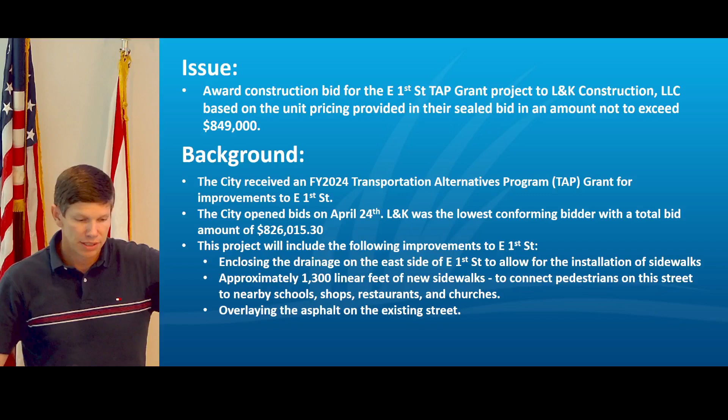Clint, you got a couple things for us on our capital projects department? Yes, sir. The first one I've got is the construction contract for the East First Street Improvements Project. And this is the same one that we came in a couple weeks ago for the CE&I. So we opened bids last week, and L&K Construction had the lowest bid. We recommend approving in an amount not to exceed $849,000. And we did open bids on the 24th. We had 5 bids, and L&K was the lowest in the amount of $826,000. But since it's unit pricing, we had $849 in the budget, so we'd rather go ahead and award in case

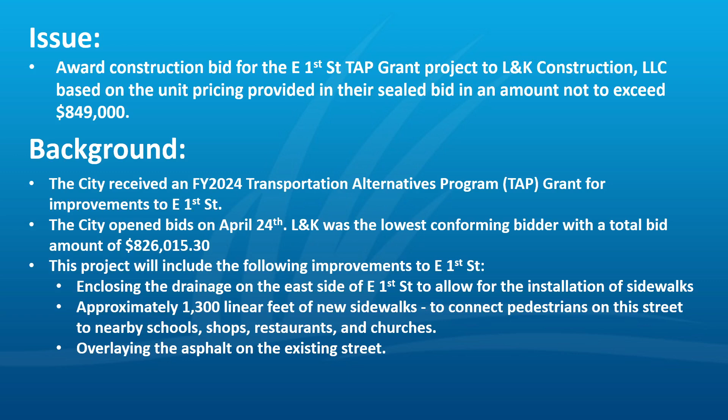we have any overages. And so this is the project that includes the improvements to East First Street, which are enclosing the drainage on the east side to allow for the installation of sidewalks and approximately 1,300 feet of new sidewalks to connect the pedestrians here to the nearby schools, shops, restaurants, and churches, and then overlaying the asphalt on the existing street after we're done. And again, here's that map. So it's going from 16th Avenue to 20th Avenue, and it's going to be on the east side there in front of the apartments.

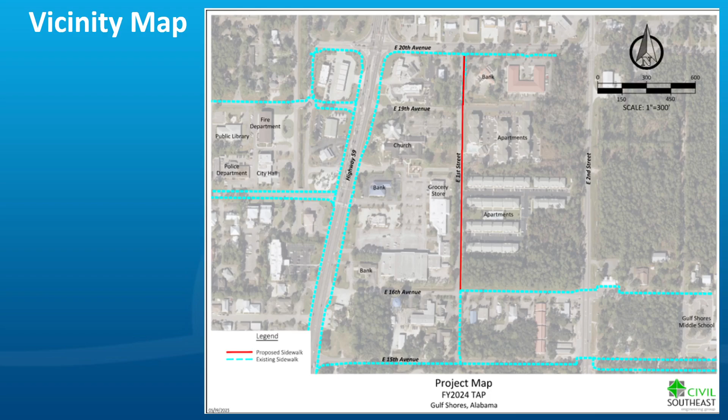And so this is budgeted in this year's budget. And so the total cost of the project is just over $1 million. The TAP grant is providing $800,000, and the city is responsible for the match of $209,000. So staff recommends awarding the contract to L&K in an amount not to exceed $849,000. And I'd be glad to answer any questions if you have any. Clint, council, any questions, comments?

I have just one. Forgive me for not remembering, has L&K done any work for us before? Yes, they've been subcontractors on a lot of projects. Trying to think, they've done a little bit of work on Waterway East for ASI. They've done some smaller sidewalk projects. This is probably the biggest one directly to L&K that we've had before, but they do a good bit of work around here. Okay, thank you.

I'm just a little nervous after what happened to us on Highway 59. This is a big project. It's not that contractor. This is a big deal on this side of town, and I would like to make sure that one gets done right and finished on time is all. Thank you. Yes. Anybody in the audience with any questions or comments? Okay, Clint? All right, the next one I've got is to apply for a fiscal year 2026 TAP grant.

And so this is to authorize the Capital Projects Department to pursue another TAP grant for next year and to commit to providing the required matching funds if awarded. And the deadline to submit for next year's round of grants is the end of this month.

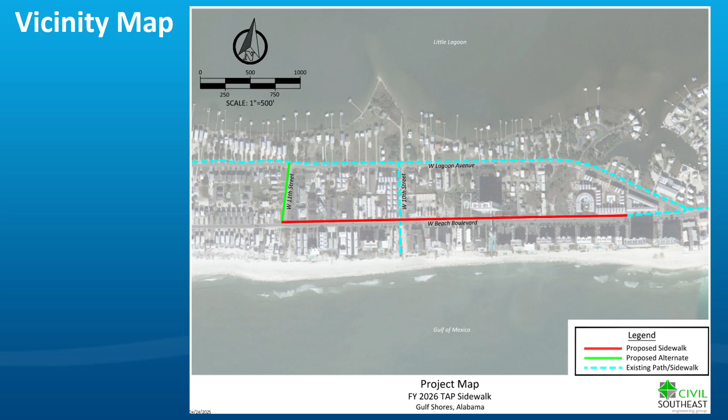And the total estimated cost of this would be just over $1 million, similar to the East First Street project. And same deal, if awarded, the grant would provide $800,000 in funding with a city match of $210,000. And this would need to be included in next year's budget if awarded. We'd probably find out in the fall, and by the time you get through permitting and everything, it wouldn't be really starting until next year.

So staff recommends authorizing Civil Southeast to submit the TAP application on the city's behalf and committing to providing the matching funds next year. And I'd be glad to answer any questions if you have them. Thank you, Clint. Council questions?

Clint, will this take the place of the existing bike path, or will they be able to move over to this? Yeah, we would leave the existing bike path there. So this would be basically as far away from the asphalt as we could get, so up closer to the right-of-way line. There would be a few light poles and things we might have to weave around, and some utilities and stuff, but this would be separated. We should be able to have a clear space of about 10 feet between asphalt and the concrete in most places. Okay.

Anybody in the audience, any questions or comments? Thank you, Clint. Jenny, Engineering Department?

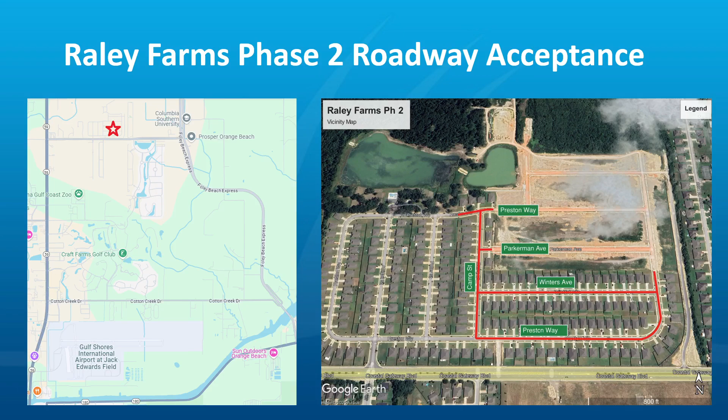Again, Raley Farms Phase 2, you can see on this map, is just about halfway between Highway 59 and the Foley Beach Express on the north side of Coastal Gateway Boulevard. And it includes a portion of Preston Way, a portion of Parkerman Avenue, as well as Winters Avenue and Camp Street. Thank you, Jenny. Council, any questions or comments? Audience, anybody? Anything? Thank you, Jenny.

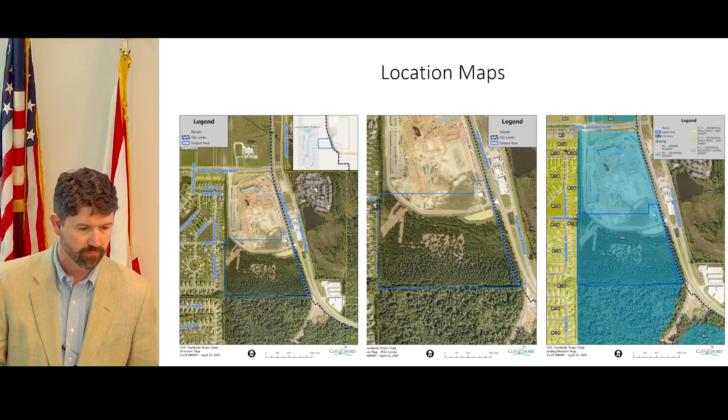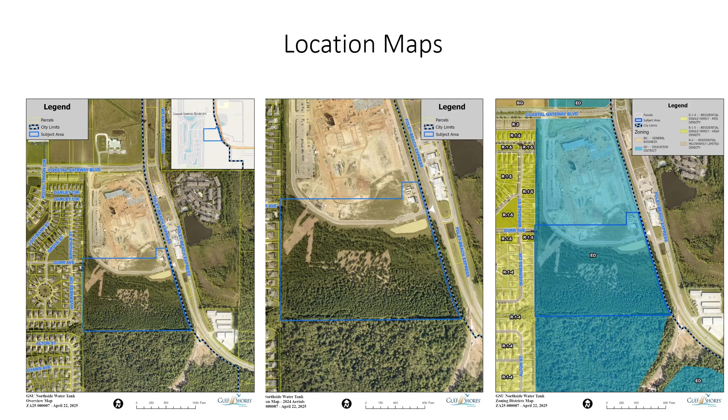Planning and zoning, we got 2 people, Scott and Andy will be doing this category. Yes, sir. Agenda item 5A is a conditional use permit application for the water tank at the high school site. Your maps here, the one on the left is a smaller scale, just showing the general area. It's south of the high school site. The one in the middle is a closer shot of the proposed area, and the one on the right shows the zoning. That blue shade is educational district zoning.

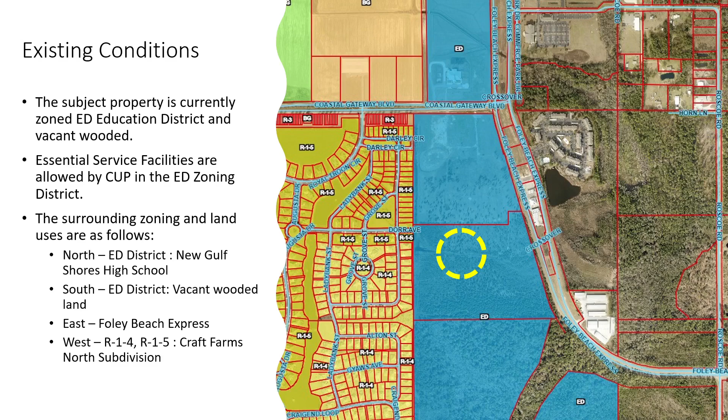We did notice the public prior to the planning commission meeting. So the current site is just east of Craft Farms North, and west of Foley Beach Express; on the other side is City of Orange Beach. To the north is the new high school building, and then to the south is wooded area.

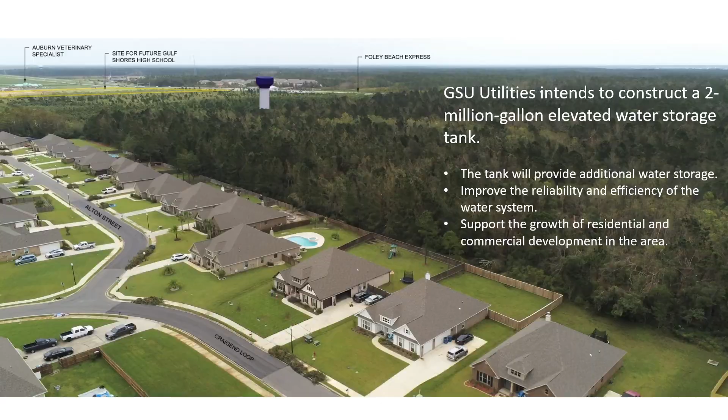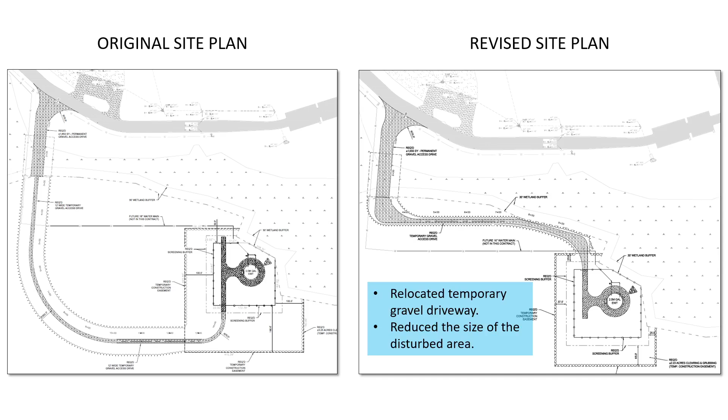This is a rendering of the proposed site. So our viewpoint, we're hovering over Craft Farms North and looking toward the northeast, and you can see the proposed water tower there in the background. The plan on the left was what was originally submitted to staff prior to the Planning Commission meeting. On the right it was revised to modify the driveway access so as not to cause any future conflicts with potential sports fields and other educational facilities.

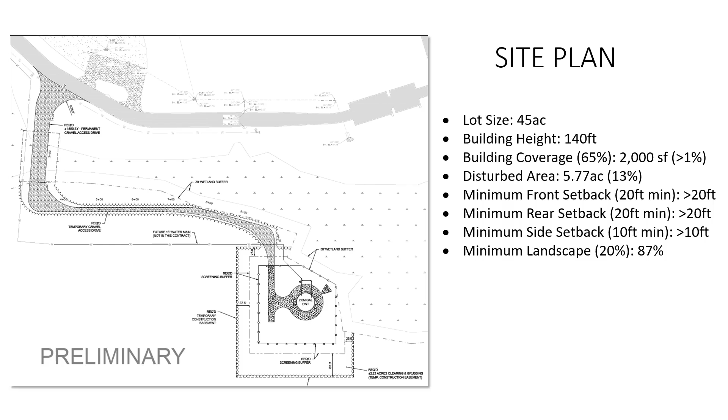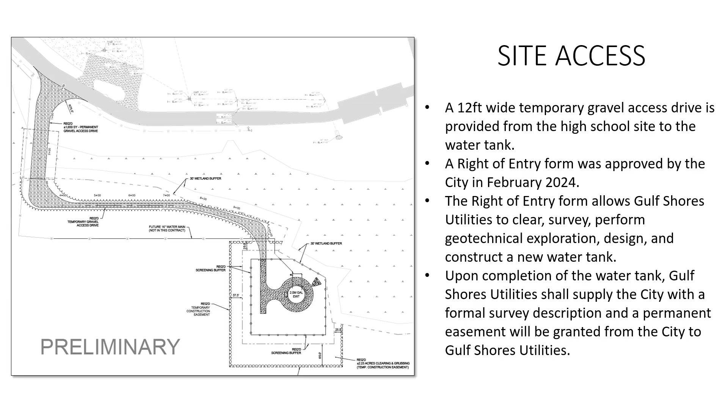So the site plan, as you can see, it's a 45-acre site, so there's more than adequate room. The tank itself will be 140 feet tall, and it is very far away from all the minimum setbacks. The site access is a 12-foot today. Well, in the near future, it will be a temporary gravel access from the existing drive that's out there. At the end of the project, Gulf Shores Utilities will supply a formal survey so the city can turn around and give a permanent easement for access.

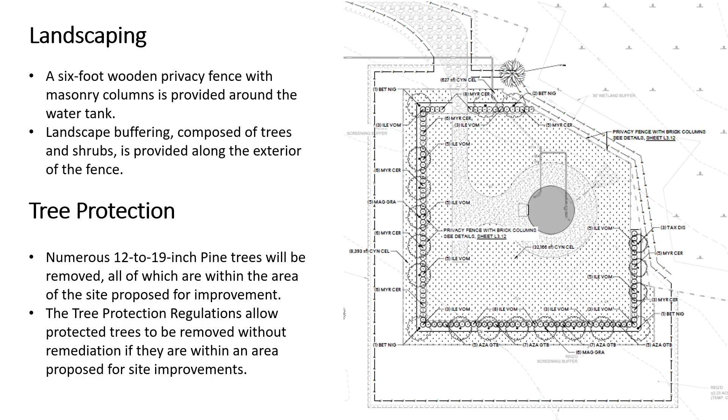Part of the conditional use permit is, again, the underlying zoning is educational district, and essential service facilities are a CUP allowed use in the educational district zoning. So we looked at that again, locate the water tank to maximize the distance from adjacent businesses and minimize the visibility as much as possible. Keeping in mind it's 140 foot tall, but the base is as far away as possible.

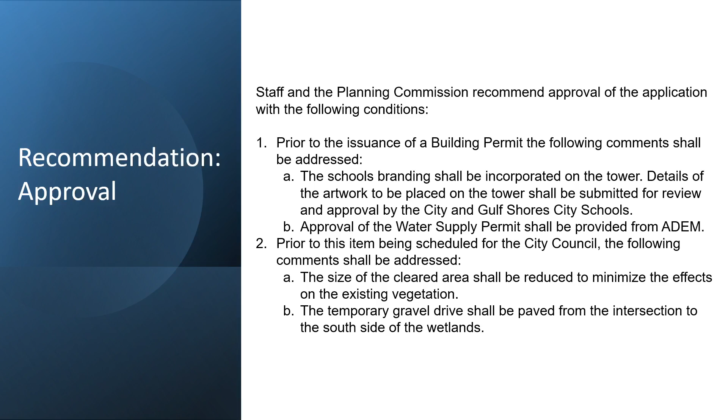Any questions on this application? I didn't understand, did you say the FAA did require lighting or did not? No, sir, it is not required. However, if they do put lighting on the top, it'll have to follow FAA guidelines. Okay.

Your honor, we have some members of the utility board here, if there are any specific questions for the utility. Rhonda Davidson is here. Yeah, okay, Rhonda's here. And I will point out, you will not see this on next week's agenda. We have to do some minimum advertising, so it may be into June before you see it again. Okay.

Andy, you got a CUP plan for MediaCom?

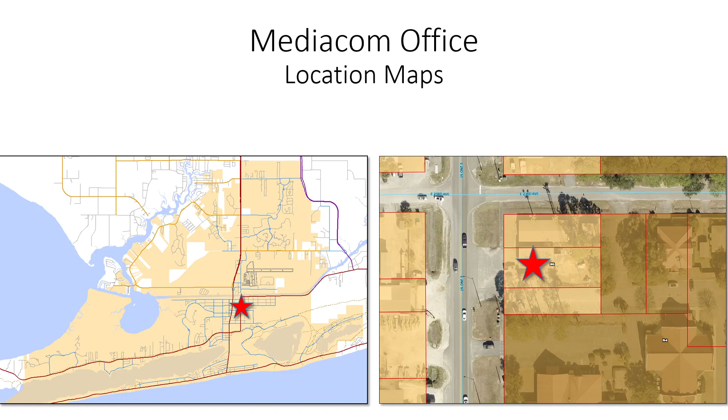Underlying zoning is general business. Office uses are allowed by right. Overlay zoning is the site is within the Waterway Village Overlay District and in the T5 Neighborhood Commercial Subdistrict. So the proposed office use also is allowed in the T5 Neighborhood Commercial Subdistrict. Future land use plan designates this parcel's future land use as commercial and mixed use. And then the Planning Commission voted to recommend approval of this application at their January 25th, 2025 Planning Commission meeting.

So the proposed site plan, the existing building is in brown. The proposed 973 square foot addition is in brown highlighted with yellow. A lot of the green area to the front and to the lower part of the existing building is currently asphalt. All that will be removed and become landscape space. The green area behind the building is existing dirt / landscape space. You will see the parking that's proposed will be out within the East 2nd Street right-of-way.

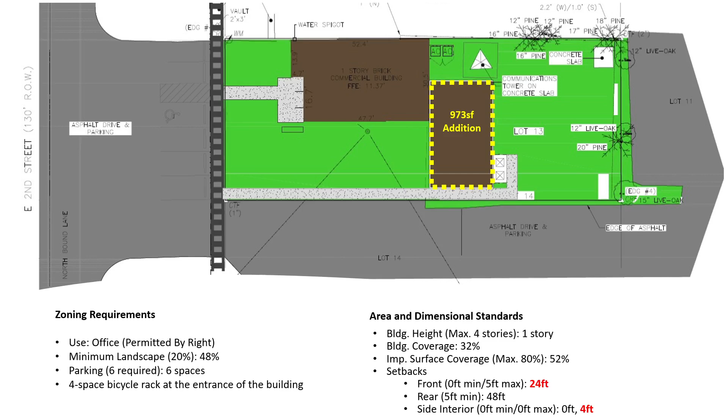And then the interior side yard setbacks in the Waterway Village Overlay District are 0 feet minimum and 0 feet maximum. The existing building is 0 feet on the north side yard setback, but the new proposed building will be 4 feet off of the south side yard setback. So that's another reason they'll need a conditional use permit. The garbage containers are stored behind the building, and a concrete sidewalk has been provided as a way to roll the trash containers out to the public right-of-way for pickup.

Proposed addition to the building, right now it's proposed to be Hardiplank board and batten siding. There is a condition in our recommendation because this is an older building, and we want to make sure that the proposed architecture does not detract from the existing older building. So we place a condition in there that some of the architecture could change based on our review of the older building versus the proposed building, as well as some of the historic architectural regulations that actually Scott has a lot of experience with in some of his former jobs. So we're still working with the applicant. They agree to make sure that the architecture does not detract from the existing building.

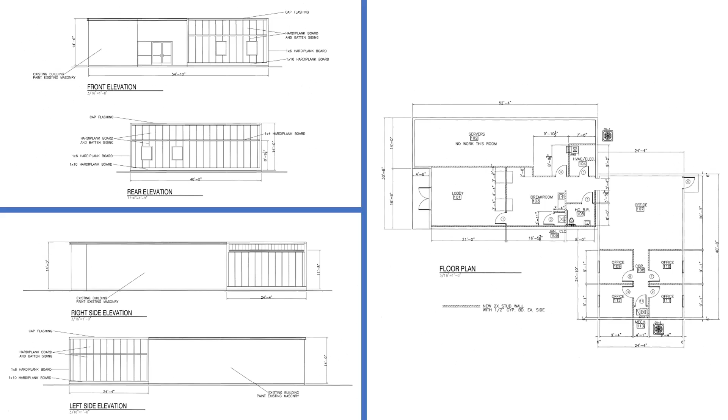Proposed addition will have basically 4 offices and a larger office space. And then the existing building has a lobby and a break room in it. So again, access and parking, the area in front of the building will be utilized for the 6 on-street parking spaces. The applicant has provided an engineer's estimate in an amount of just over $38,000 or close to $39,000 for the construction of the angled parking, sidewalks, and landscape planter strip.

So as you know, we have a design for the on-street parking along East 2nd Street. They are not constructing it per the city's design yet, but they're paying a fee in lieu so that we can take their money and construct it all at one time whenever we get to that point. But they will utilize the East 2nd Street right-of-way for this required 6 on-street parking spaces. Similar to what we did at Galway House, they utilized some of the existing parking within the right-of-way for their required parking.

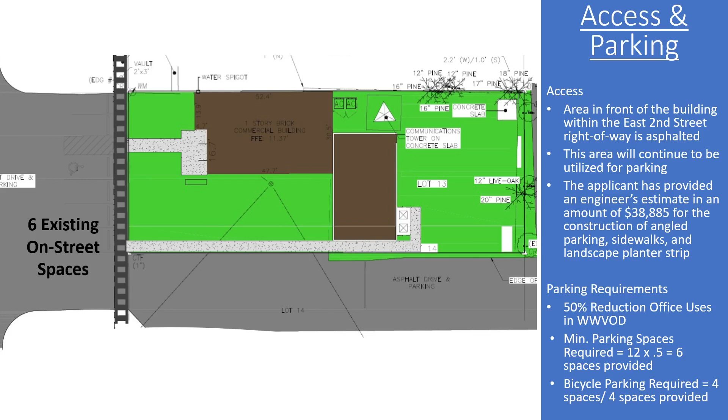Landscaping and tree protection, there are 6 existing trees on the site, including 2 12-inch live oak trees. All those trees will be preserved. They've actually earned 13 tree credits by preservation of the trees. The landscape and open space, the Waterway Village District does not require the normal landscape standards. It only requires parking lot landscape standards. So the applicant actually exceeds the minimum requirements. They provided a substantial amount of landscaping between the on-street parking and the existing building, which should help greatly enhance the looks of the building. Instead of having a sea of asphalt in front of the building, now it'll be a nice landscape space there.

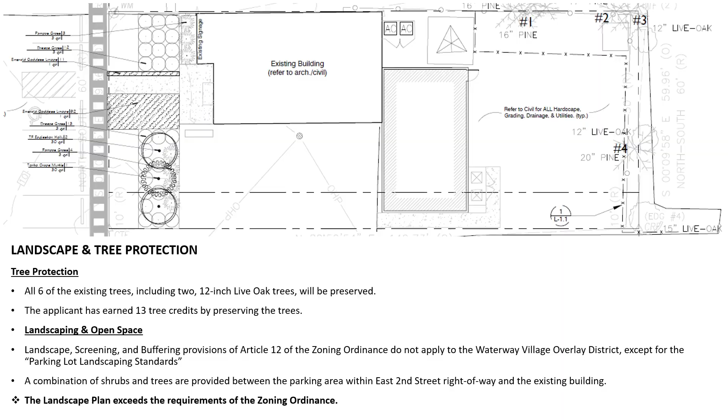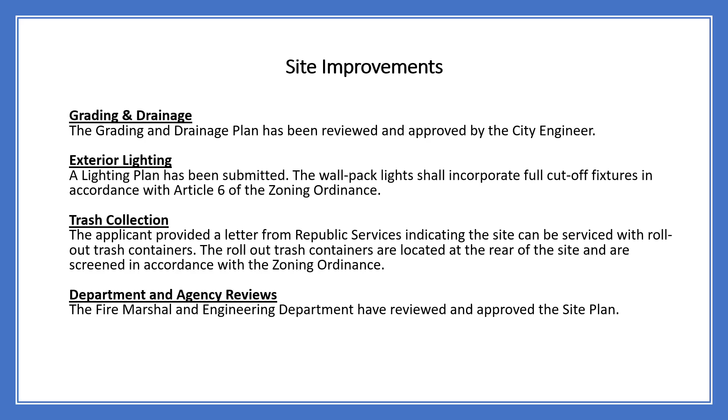Site improvements, grading and drainage plans, exterior lighting, trash collection have all been reviewed and approved. And the fire marshal and engineering department have reviewed and approved the site plan. Conditional use permit. Again, they seek a couple deviations from the underlying zoning standards. So they request one modification to Article 13-5, alteration of non-conforming structures, to allow a new addition in the continued use of the existing building and premises.

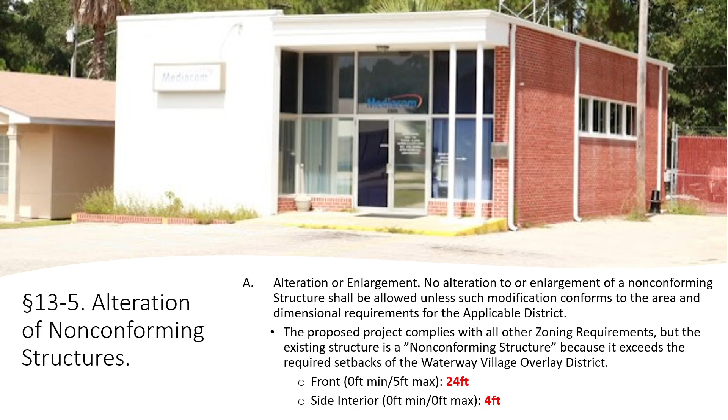Here's an older picture of the Mediacom building. So this section states that no alteration or enlargement of a non-conforming structure shall be allowed unless a modification conforms to the area and dimensional requirements of the applicable zoning district. The proposed modification or new construction complies with all the zoning requirements except for the two setback deviations that I pointed out previously. The front setback, the existing building is 24 feet, and the minimum standards are 0 feet minimum, 5 feet maximum, and then the south side yard setback proposed is 4 feet, and the minimum is 0 feet. So they seek a deviation to those couple of setback regulations.

City staff does support the applicant's request. This building was constructed in 1961. It's one of the older commercial buildings in the city. This, I believe, was the original post office. I know it was a post office at one point in time, so we would like to preserve the historical character of this building. This complies with the purpose of the Waterway Village Overlay District, so we do support those deviation requests.

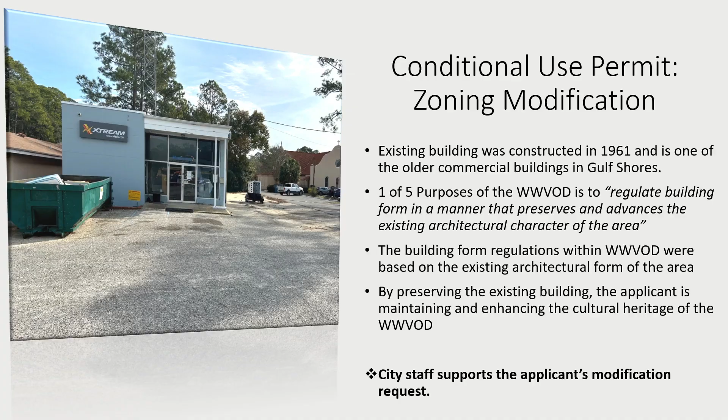So with that, staff and the Planning Commission recommend approval of this application with 4 conditions. Grant a modification to 13-5 to allow the applicant to utilize and add on to the existing building. Number 2, the wall pack light fixtures shall be full cutoff fixtures. Number 3, prior to the issuance of a building permit, the applicant shall pay a $38,885 fee in lieu instead of constructing the angled parking, sidewalks, and landscape planters within the East 2nd Street right-of-way. And then number 4, the applicant shall work with the city to preserve the historical architectural character of the building.

I'll be happy to answer any questions, and much like the previous application, we'll have to advertise this before it can be placed on a city council agenda, so it'll probably be late May or early June.

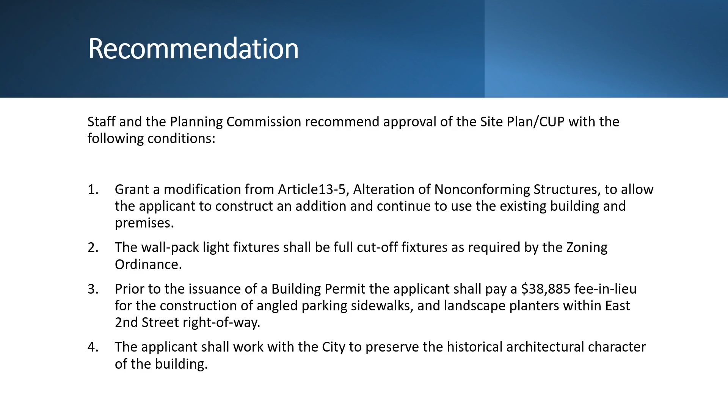We've not had many of those here since I've been mayor, so it's kind of a new process for me. Right, me too, Mayor. We just want to make sure the character mirrors the existing building, but doesn't look like it's a completely different building or detract from the existing building.

Any other questions, council? Andy, could you go back to that last slide, explain number 3 to me again? For the condition? Yeah, this one. So, the fee in lieu. So we do this a lot when there's not an existing sidewalk within a public right-of-way. So the zoning regulations state that the applicant has the option to build a new sidewalk in accordance with our master bicycle and pedestrian plan and the zoning ordinance, or they can pay a fee in lieu. Because there's no existing sidewalks in this location, and the city's about to go through streetscaping construction, hopefully, in front of this site, we recommended that the applicant pay a fee in lieu.

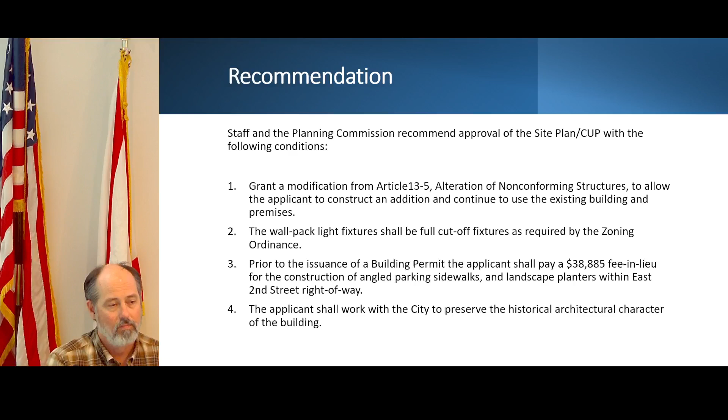So they give us an engineer's estimate for how much the sidewalk would cost, the parking, in this instance landscape planters, and that came out to be $38,000. So they're going to pay a fee instead of constructing those improvements. Okay, that's all I was curious about, the planters and whatnot. All that's within the East Second Street public right-of-way. Okay, yeah. Does that make sense? Okay. And one other question, on the setbacks, can you go back to that slide? Certainly.

Right, yeah. What does that mean, 0 and 0 for the side? So that means that in the Waterway Village Overlay District, in a lot of the sub-districts, the building should take up the entire width of the property. So if someone would, or they have to build to the entire width of the property? Yes, sir. Why is that?

So the idea in the Waterway Village District is to kind of create a downtown building form like you may see, and I'm going to use Fairhope. Downtown Fairhope, all the buildings are attached to one another. Yeah, wall to wall. They're on their own lots, but they're all attached to one another so that they're built out 100% of the lot width, and the parking's usually in the street. I think there's some places in Fairhope that have little alleys where you can get to service, the garbage and deliveries and things of that nature.

So that's the idea of this district, but when there's existing buildings there, it doesn't always work. Yeah, obviously, it's not gonna work. Right. Anyway, probably people at home watching aren't familiar with all this, so. Yes, sir.

That's it. Thank you. I just want to reiterate the importance, I think, the value of this end product, the aesthetics of how this building gets designed and finished out. I know we have a provision for preservation of historic buildings, but every old building in town to me doesn't have historic value worth preserving and adding on to. And I'm not saying anything about this particular building, but every old building doesn't qualify. So to make a new building look like an old building that maybe doesn't qualify. So my point is, I think it's really important.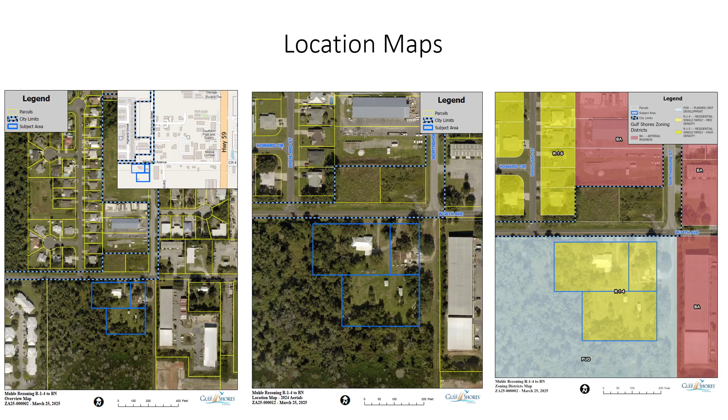The diagram on the left shows that it's located on West 36th Avenue, almost but not quite directly south of the intersection of West 36th Avenue and North Shore Street. You see a zoomed in version in the middle of the screen. The right-hand side shows the existing R1-4 zoning, surrounded to the south by PUD and then BA zoning, and, oddly enough, some unzoned property across the street. Existing conditions: the property currently contains a single-family house and a couple accessory buildings.

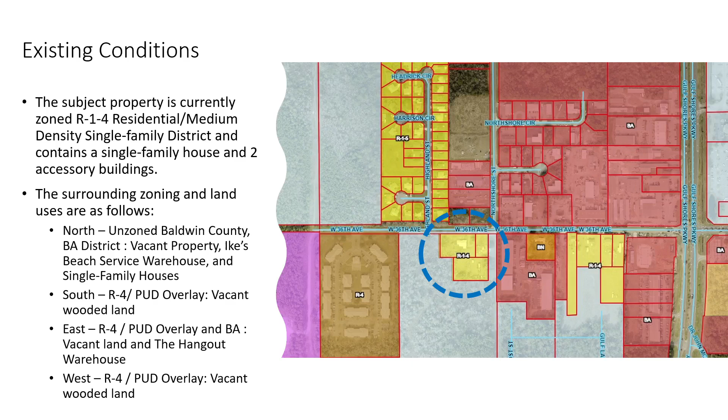Surrounding zoning and land uses: directly north is unzoned Baldwin County. Further to the north, you've got some BA arterial business zoning, occupied by Ike's Beach Service warehouse. To the south is vacant wooded land, part of the Lake Planned Unit Development. Directly east is also vacant land, part of the Lake PUD. Further to the east is zoned arterial business, occupied by the Hangout warehouses. And to the west is vacant land, part of the Lake Planned Unit Development. A little bit further is Seagrove Apartments.

At the March Planning Commission meeting, the Planning Commission voted 5-1 with one commissioner abstaining to recommend approval of this application to the City Council. So the existing zoning, again, it's R14, medium density single family. This district exists for the development or preservation of existing single family houses.

The requested zoning is neighborhood business district. The neighborhood business district is intended to provide a transitional buffer between commercial activities and nearby residential neighborhoods. Non-residential uses are limited to those that can be compatible with the residential character of adjacent neighborhoods.

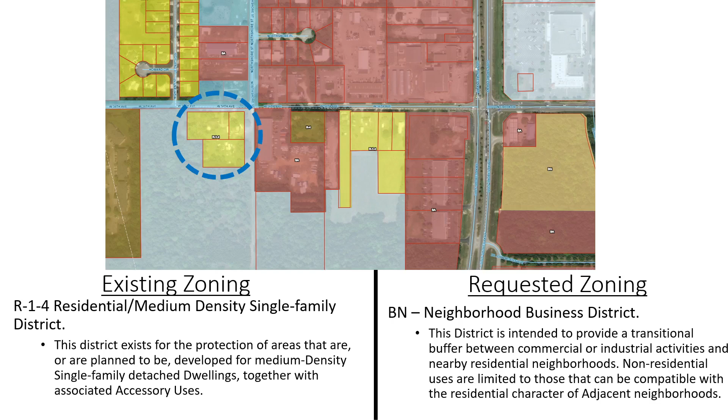So in the neighborhood business zoning district, number one, the permissible commercial uses are greatly restricted to only those that are pretty much compatible with housing. And then also any commercial use greater than 5,000 square feet must go through the CUP process. That's the only way they're allowed.

The future land use plan designates this property's future land use as mixed use commercial. As you all know, mixed use is encouraged in the land use plan. Mixed use may be one development or one building with commercial on the bottom and residential on the top, or it could be horizontal, spread across the land with a commercial building and then residential buildings on the same property.

This is a fairly small property, 2.37 acres, so it'd probably be hard to do a lot of horizontal mixed use. And then mixed use centers are also located within or adjacent to activity centers. This is relatively close to the State Highway 59 and West 36th Avenue intersection. There's the site.

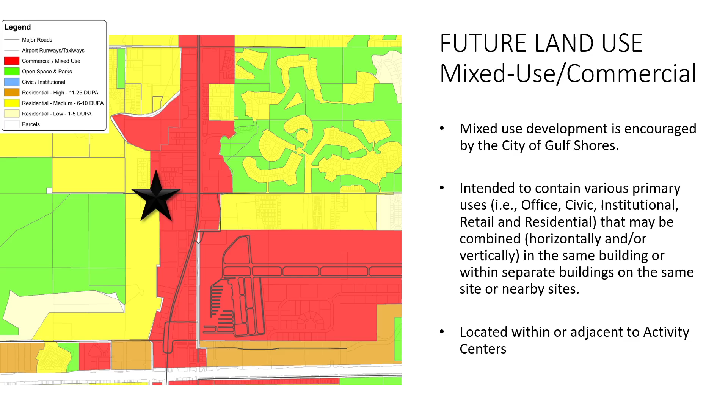So under the analysis portion, the property is located at the intersection of West 36th Avenue and North Shore Street. This has become a lot more of a primary route for the residents within Aventura and kind of a cut-through route for citizens getting around, dodging the traffic on Highway 59 and going towards Oak Road West. The surrounding area is a mix of commercial uses, the Highlands subdivision, warehouses, and vacant wooded land associated with the Lake PUD.

The land use plan encourages mixed use. We believe that the rezoning of this property to neighborhood business would support the mixed use development goals of the future land use plan. The neighborhood business district is intended to provide a transitional buffer between commercial uses and residential neighborhoods. Where this property is situated, it's located right now between commercial uses to the east and residential uses further to the west.

Again, the commercial uses are greatly limited in the BN zoning district. And we believe the configuration and use of the property aligns with the goals of the neighborhood business zoning district. And with that, staff and the planning commission support the requested rezoning and recommend the city council approve the application. And again, since it's a rezoning request, it will have to be publicly noticed and will not be heard at next week's agenda, probably either late May or June. Be happy to answer any questions.

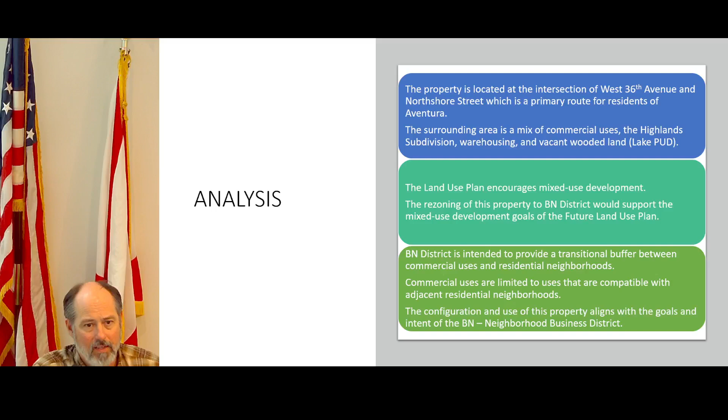And Councilman Harris is correct. Conditional zoning is allowed by the zoning ordinance. So if the city council wants to place specific conditions on a zoning, it is allowed. If there was concern for that multifamily use, that 23 units per this site plan, do we have any other ability to regulate the intensity of that property if it's zoned neighborhood business?

So without placing any conditions on it, neighborhood business allows 10 units per acre. The maximum they could get there is 23 units. Any multifamily development would have to follow the relatively new multifamily regulations in Article 1121 of the zoning ordinance. I think two different building types would have to be on the property, two different types of open spaces, a couple of different types of amenities, blocks and streets. So I don't know if you could get 23 units, but that is a maximum that is allowed there.

So there will be another process to go through with additional regulations to build multifamily there. I can't tell you exactly what you could get, but it would probably be challenging to get the maximum potential there. Would that have to go through site plan approval, correct? Go through site plan approval, yes, sir. Would that come to the council, or would that be just the planning commission?

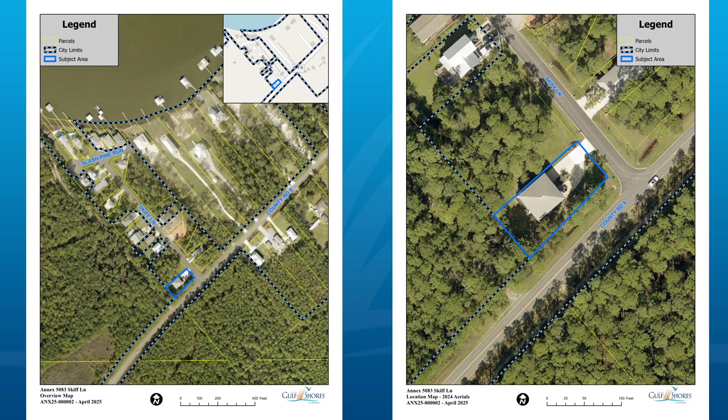Agenda item 5D is an annexation request. So it's lot 1 of the River Pine subdivision on Skiff Lane. The application states that the reason for the request is for city benefits and city schools. So your map here on the left shows the entire River Pine subdivision between County Road 6 and the river. The map on the right just shows a closer shot. There's an existing single-family structure, a house, on the site.

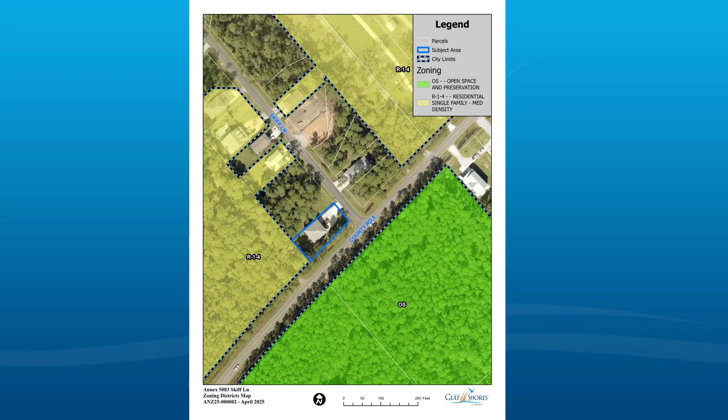This map is probably a little easier to read. It's the zoning map, so the shaded areas are inside the city limits today. So the yellow is R14, single-family residential. So you'll see the site is contiguous to existing city limits. And then across the street, that green is city-owned property that's zoned for open space. So two sides, you have the contiguity. Well, that's my last slide. That's in the report. And if you have any questions, I'll be happy to answer.

Council, any questions, comments? Anybody? Thank you, Scott. Thank you. Grant? Yes, sir. Good afternoon, everybody.

So we have before you today an assembly permit application. This is Lulu's Presents Doc's Hot Trot for ARC, requesting June 14th, 2025. This is a long-standing 5K and 1 mile fun run that takes place in and around Lulu's, and they run through Commerce Park, and I'll show you the map in just a second. June 14th, 2025, which is a Saturday.

Dennis Young, who I spoke to earlier today, is representing Robertsdale Rotary Club Foundation to benefit the ARC, Retired Citizens of Baldwin County. It's a 5K and a 1 mile fun run, anywhere from 250 to 500 participants, but all the pre and post activities take place at Lulu's. So Lulu's is a big partner with Robertsdale Rotary Club.

So before you is the standard approved route that is an actual defined race route that allows the participants to qualify for other types of runs. The start finish is at Lulu's, and it runs out Waterway East and then runs through Commerce Loop, then back to Lulu's. We will be having some construction during this time of the month of June.

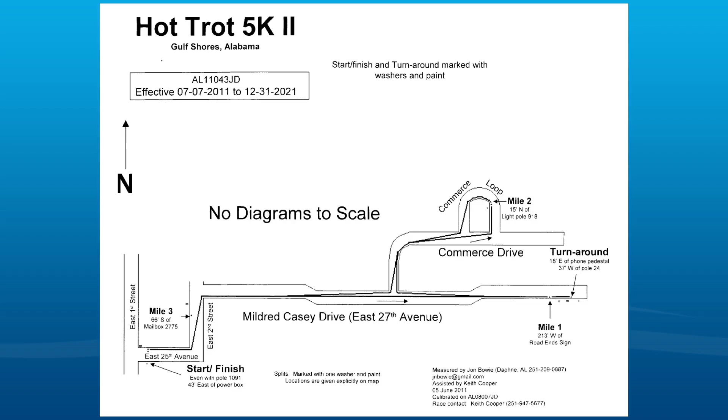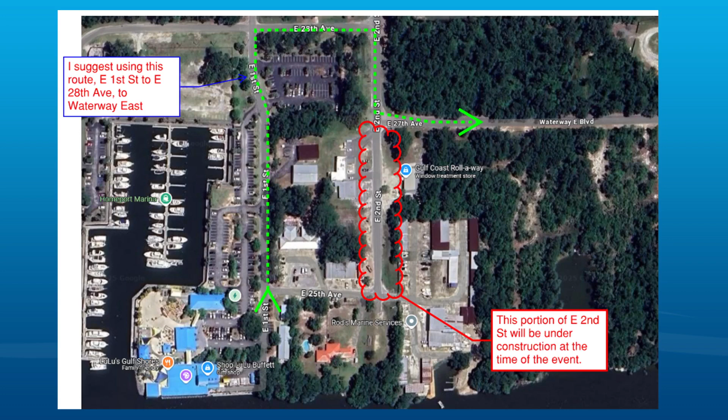So Clint, with our Capital Projects Department, has proposed an alternate route where in green on your map, they would run north out of Lulu's up to East 28th Avenue, then east over to 2nd, then south to Waterway East, and then roll into the rest of the race route. We are recommending approval of this application. We will work with the applicant and the contractor, and the city will make the final determination on what route is the best for accommodating the construction that's going on Waterway East, in and around Commerce Loop.

Of course, we've got the airport that is now having commercial flight service, and so this whole area is becoming busier and more used. So we will work to make sure that this is not an inconvenience to anybody. And I have talked to Mr. Young too about looking for an alternate location for this run for the future when this area really gets rolling after this June 14th. With that, I'd be happy to answer any questions.

They're trying to meet a certain certified distance? They are, yes, sir. 5K? They'll remeasure what the route is that they end up with, but they are trying to meet a certified race certification. Yes, sir. It's a 5K and a 1 mile fun run too. Any other questions, council? Comments? Anybody in the audience? Anything? Thank you. That concludes the agenda for new projects.

Clint, you got an update for us on the status of Highway 59? Yes, sir. So the plan is currently for Wednesday night to do some restriping between 19th and 20th, right here in front of the Circle K and Blaylocks, so that we can restripe that new section up next to the median and get traffic shifted over. Of course, there is rain scheduled some this week, so that may get pushed a day or two. But we'll get that out before that happens. One lane will be closed while they're doing striping.